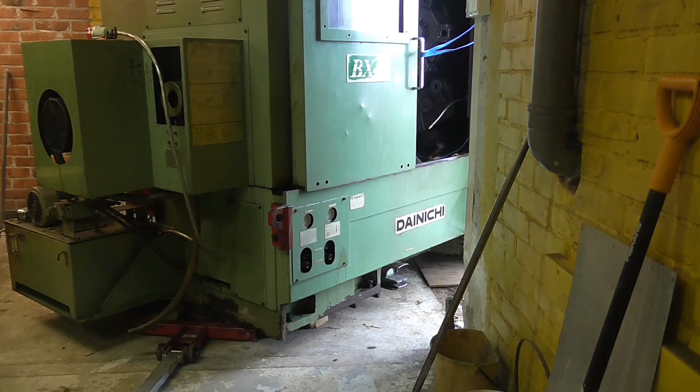So, I hope you liked the move video. The camera battery ran out when the lathe was about 3 meters from where it is now, but you didn't miss anything. It was just like the first 3 meters of the 6-meter journey.

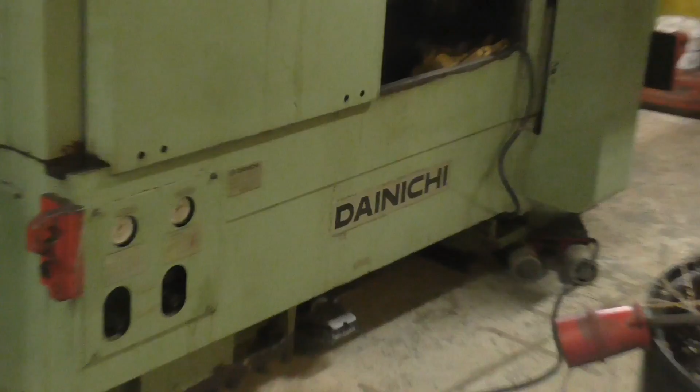So now let me tell you a few words about the lathe itself. It's a Japanese Dainichi BX45, made in Osaka, Japan in 1985. So it's a really old machine.

And it sure has seen some pretty extensive use, but I still didn't find a single thing wrong with it when I inspected it with the power on. But I'm sure there will be some, I hope, just minor issues. I still think it's actually completely usable as it is at the moment.

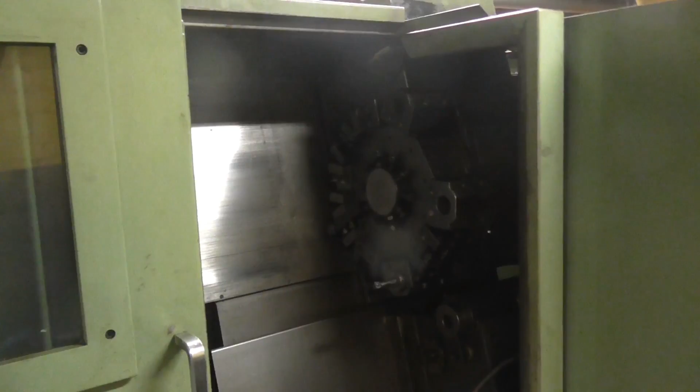So it's a CNC lathe, and as you can see inside, it has a 10-position tool turret, and it also has a tailstock. On the left side is of course the headstock with a 10-inch Kitagawa chuck, and it's a hydraulic chuck.

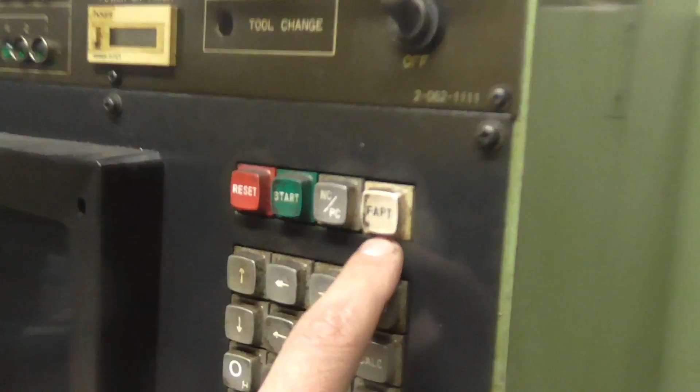So what else? The controller, even though it's old, should be pretty good. It's a Fanuc 10T, the F model, so it has this FAPT mode, which is kind of Fanuc's own CAM program inside the machine itself.

So first you draw the piece that you want to make, and then you do all the turning operations, select speeds and feeds and tools and everything, and then you can do simulation. So pretty much exactly the same as a modern CAM program. I'm pretty excited about that.

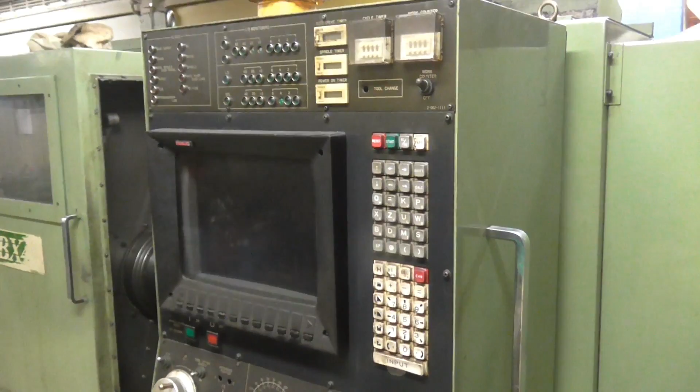But it is old. But even the screen is a color screen, which is pretty awesome. I think this was a pretty expensive machine when it was new.

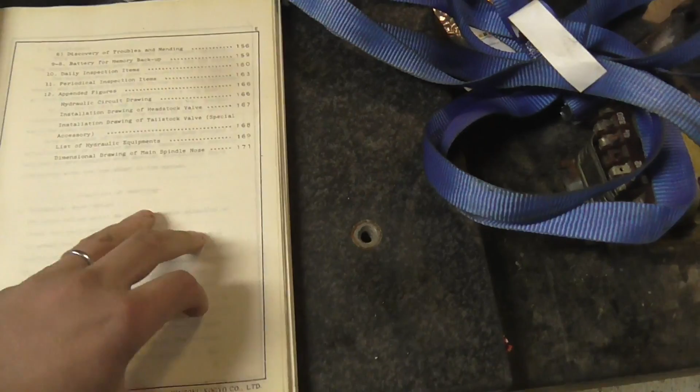So what else? Let's talk about, actually I can show you the operator's manual, which has pretty good information about the machine itself. Let's see if I can find it. Did I go over it?

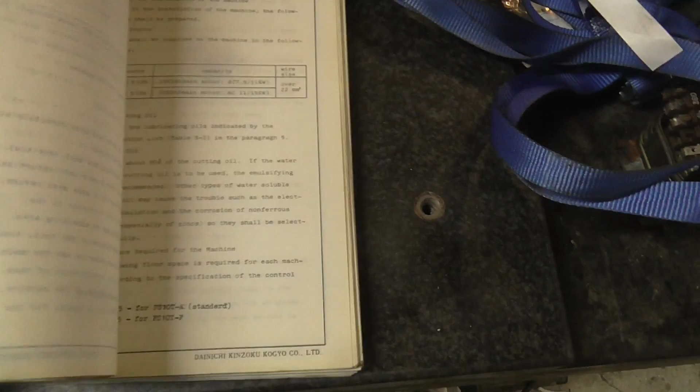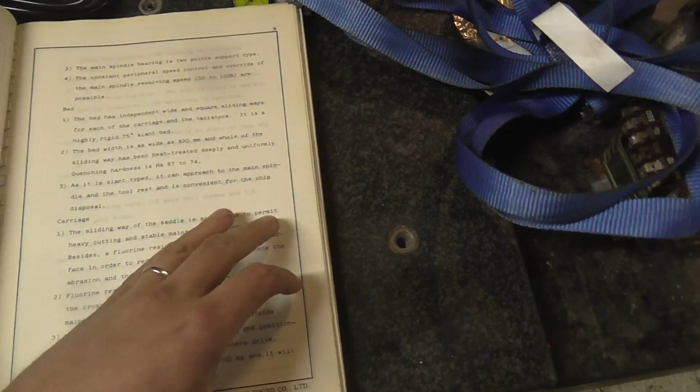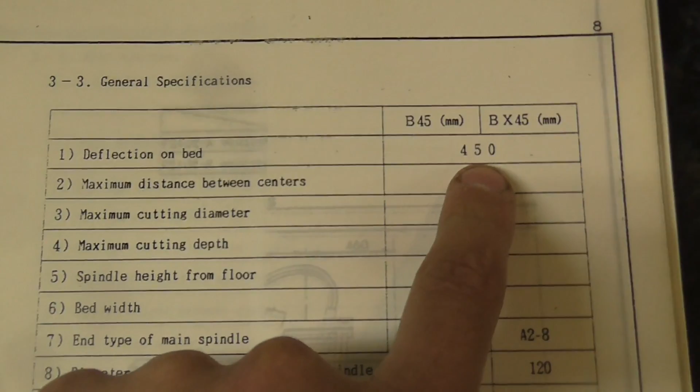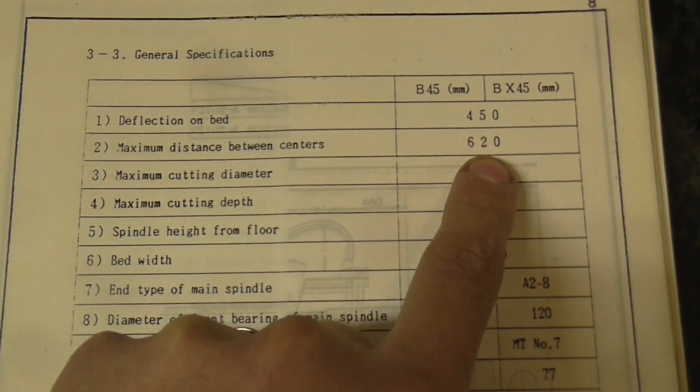Specifications. Okay, general specifications. So this is Japanese English, so deflection on bed - I think it means the maximum diameter that can be set on the spindle. That's 450 millimeters, and the distance between centers is 620, and max cutting diameter is only 230.

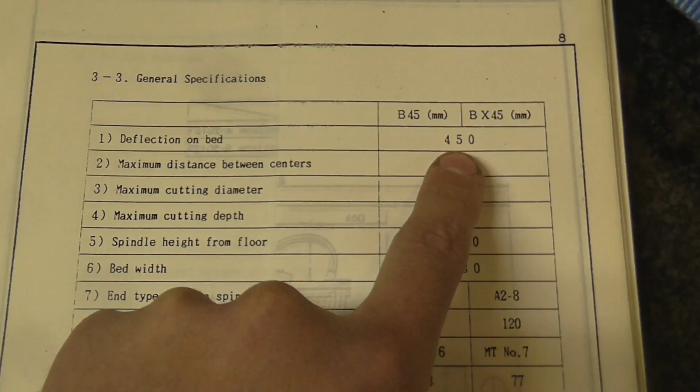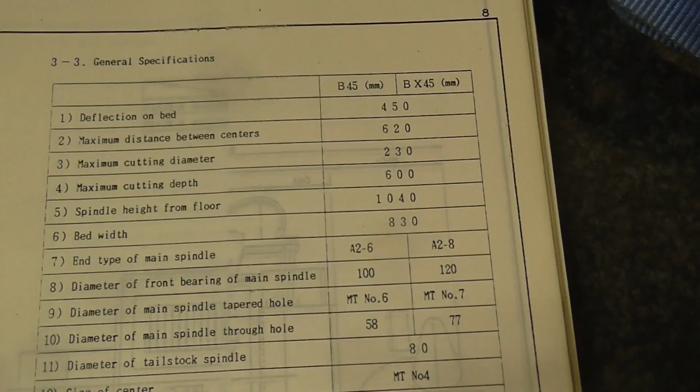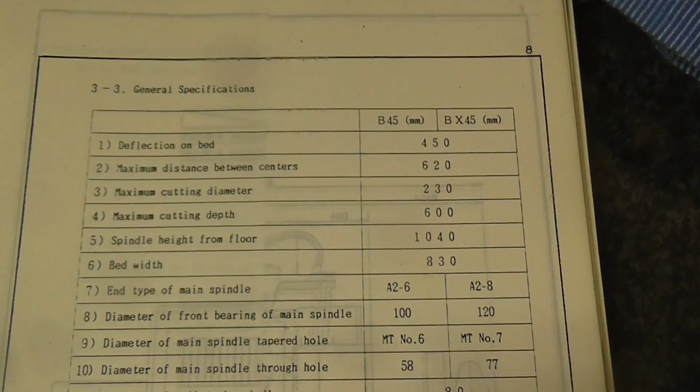I don't know why this is so little, even though the max turning diameter is so much larger. I think it has something to do with the x-axis travel, but I'll find out. So basically it's about 250 by 600, which is pretty small in capacity, but the machine is still extremely rigid.

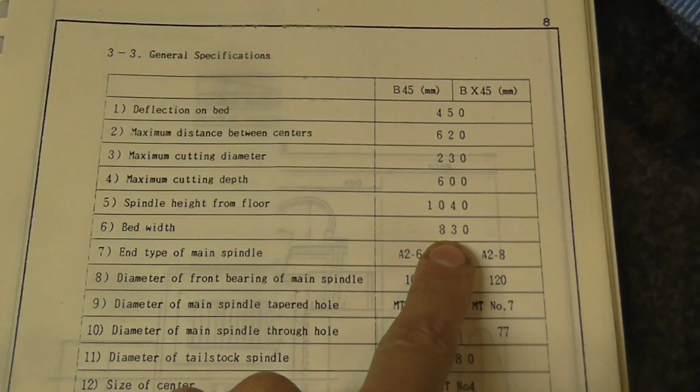So it has a bed width of 830 millimeters, which is huge. It's just huge. It's like twice my 1K625 lathe, which is considered pretty heavy duty also.

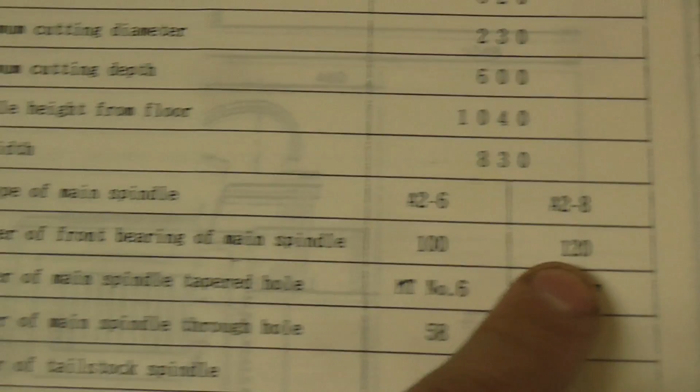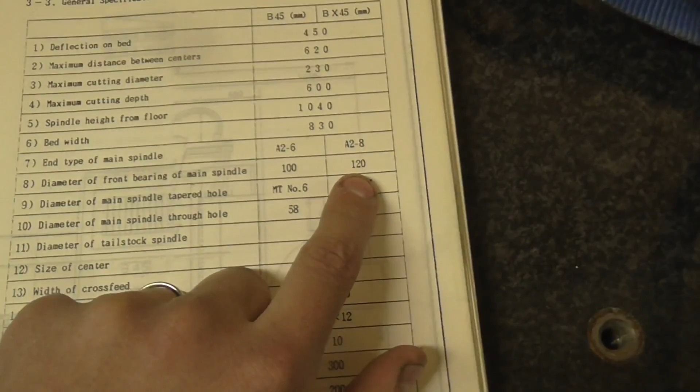And it's the BX model, so it has the main spindle diameter of 120 millimeters, which is like 5 inch, so that's a huge bearing. This must be the inside dimension of the bearing. And the diameter of the spindle hole is 77 millimeters, which is 3 inches.

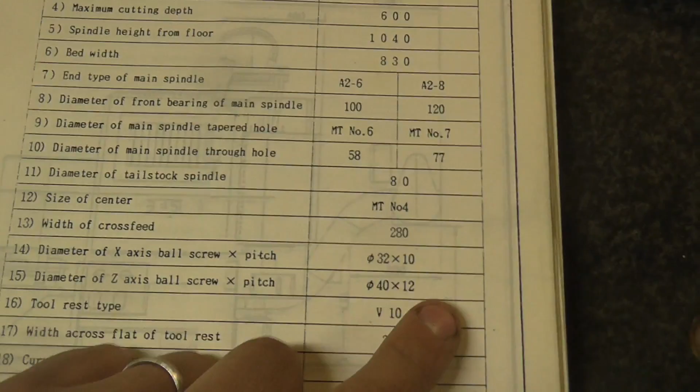And tailstock taper is number 4. Crossfeed 280 millimeters, even though this is pretty weird. It should be enough for more. And what else?

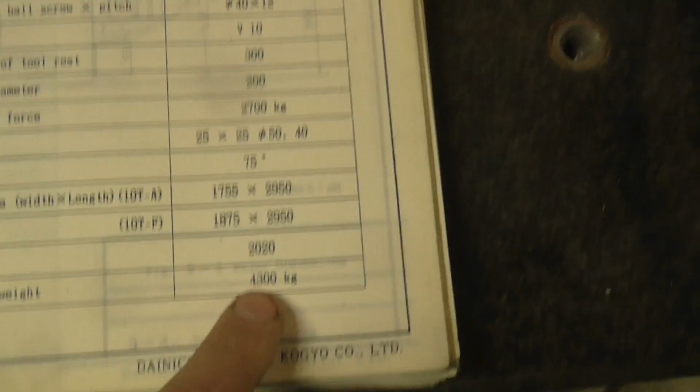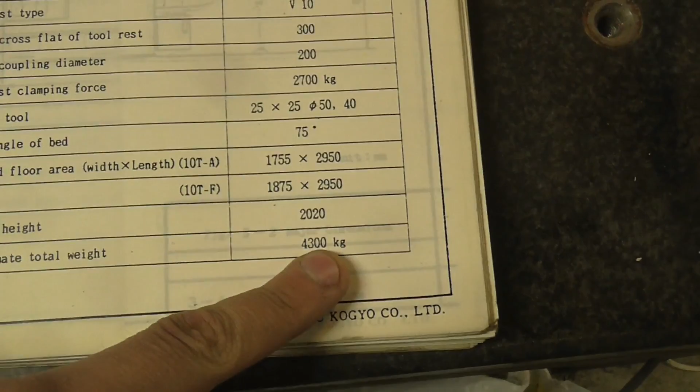This doesn't give any electrical details, but the main spindle motor is 11 kilowatt constant and 16 kilowatt peak power. So it's pretty powerful, and the spindle speeds go from 0 to 3,200, and it has 2 speed ranges.

3,200 is a pretty good speed for aluminum and for small diameters as well.

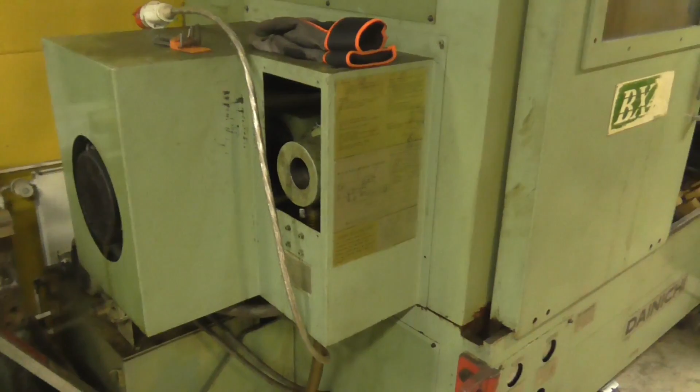It does not have a bar feeder, which is kind of good because it would take half of my workshop space. And by the way, I don't have any of my workshop space left now, so I just can't have one here.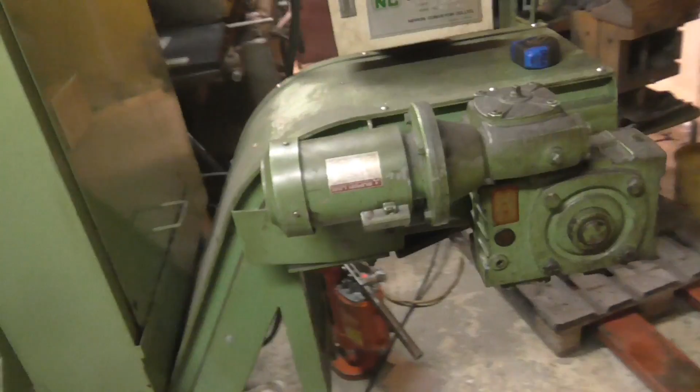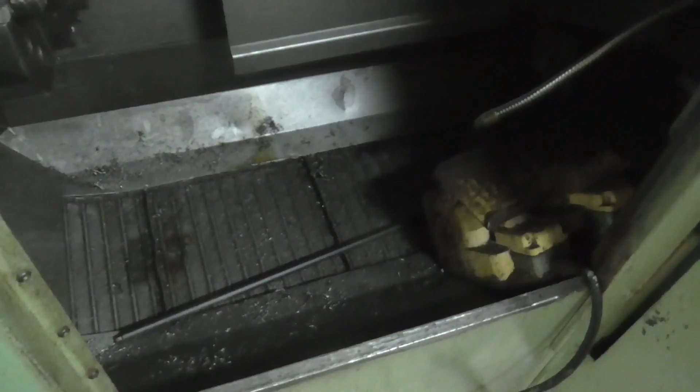But it has one other option, which is pretty great. It also takes a little bit of space, but I still like it, and it's the chip conveyor. And it also works perfectly. You just put, for example, a barrel under the belt right here, and it carries all the chips that fall on the bottom of the lathe to the barrel.

And the basic construction on a CNC lathe, as you can see, if this was a conventional lathe, you could see the bedways going right here. But this is a slant bed lathe, and I think almost all CNC lathes, at least quality CNC lathes, are slant beds, meaning that the bedways are at an angle right here. This one has a 75-degree angle on them.

Which is good because chips will not fall on them. So basically this machine is immune to chips. No chips will lay on the ways, so that's a pretty good thing. It's a very good thing. So basically if lubrication on the ways work, they will last forever.

And the ways on this machine are not linear guideways like on the Fadal. They are cast and ground boxways. So it's a very, very rigid setup.

So the Z-axis goes this way, of course, and the X-axis goes this way. You can see a little bit of the X-ways right here, and they look pretty good. When I tested it, the ways were dripping with oil, so looks like the oiling has been working.

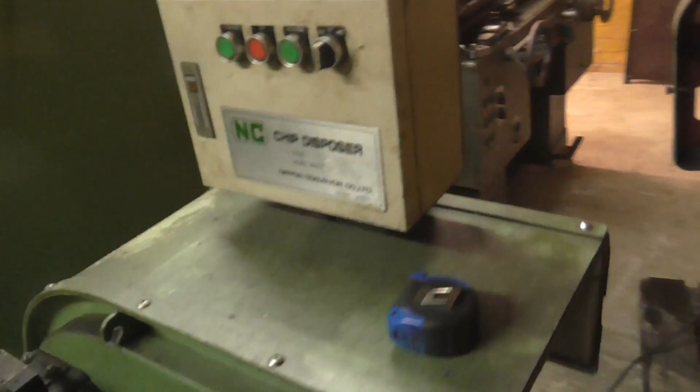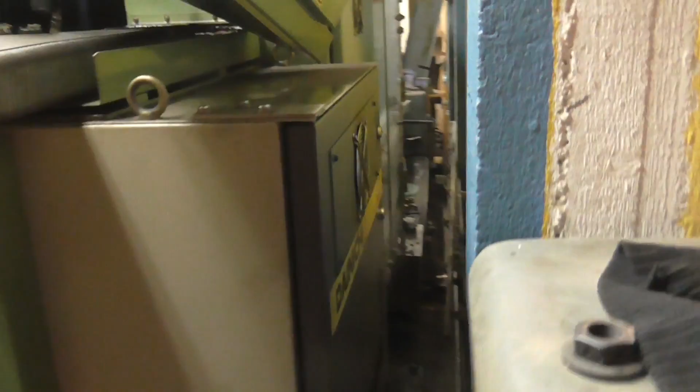So, what else? Let's go check behind it. There's an automatic oiling pump. And there's a huge amount of electric cabinets behind the lathe, which kind of makes this a very bad place for it, because I don't have any access behind it.

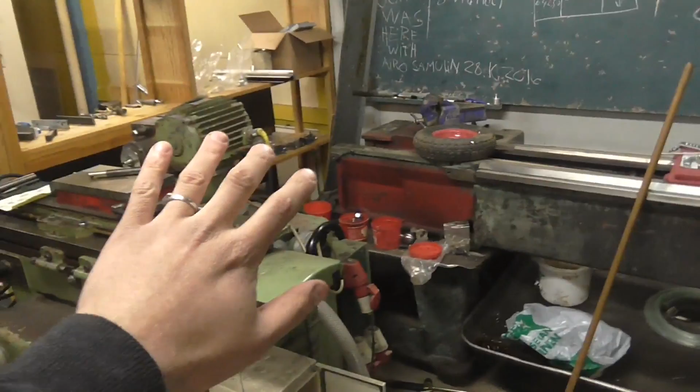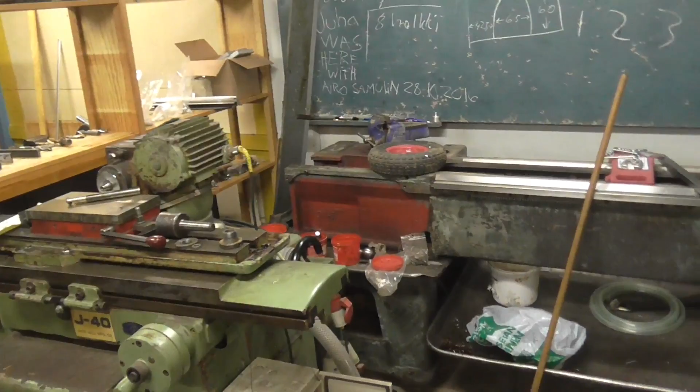But I think I'm still gonna move this. My plan is to actually move this out of the way as well as this one, and move the lathe all the way back here and set it at a bit of an angle so that it's sitting like this way right here, so that I can actually access the backside of it.

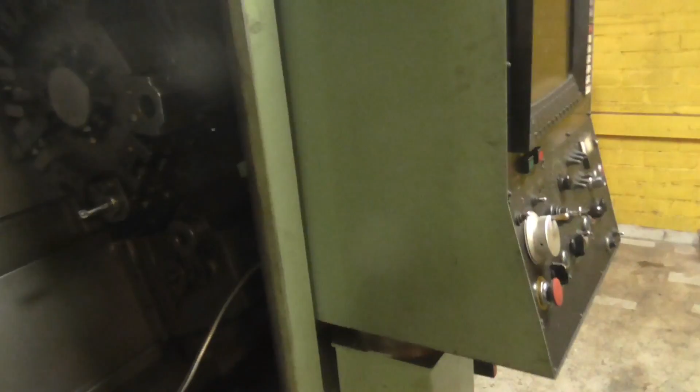Okay, and by the way, another thing I remember about lathe ways and axes. A common belief is that the lathe axes are X for the longitudinal and Y for the crossfeed, but that's wrong. Z-axis is always towards the spindle, so this is Z-axis and this is X-axis. That's how lathe axes work. Just a little addition.

Okay, so I think this is now long enough. I hope I will soon have time to put back the tracks right there and hook it up to electricity and see if my fuses are actually large enough to handle this. They should be, because it has an inverter start, as all CNC machines have.

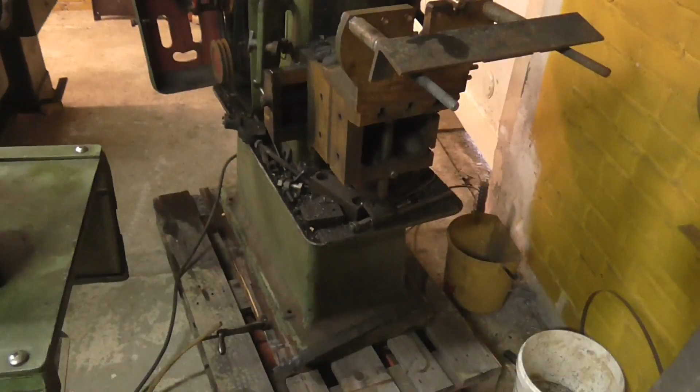And I will also be making a complete video or even a video series about the shaper. As I said, I already tried it and it works perfectly, and I think most of the machining people kind of love shapers. It's just there's something so relaxing about them. I really want to try it a little bit more soon.